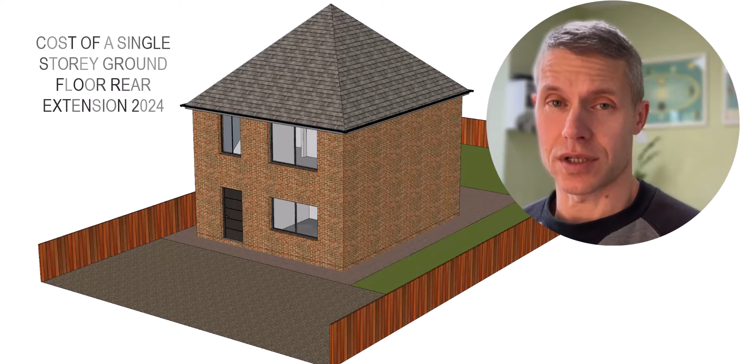Hello, my name's Scott. In this video I'm going to discuss the cost of an extension as of January 2024. The house in front here is a standard house, and I'm going to be putting a standard size extension on it. This is something I commonly prepare plans for in my normal day job.

When I started this exercise I wanted to set myself some rules to work to. All prices have been gathered from the web from various well-known suppliers such as Travis Perkins, Jewson's, Screwfix, Wickes. I generally took 2 or 3 prices and took an average. They may be cheaper or more expensive depending on location and your builder's relationship with the supplier. I've based costs on metre square, metre run, or per item depending on the element of the extension. I haven't allowed for waste.

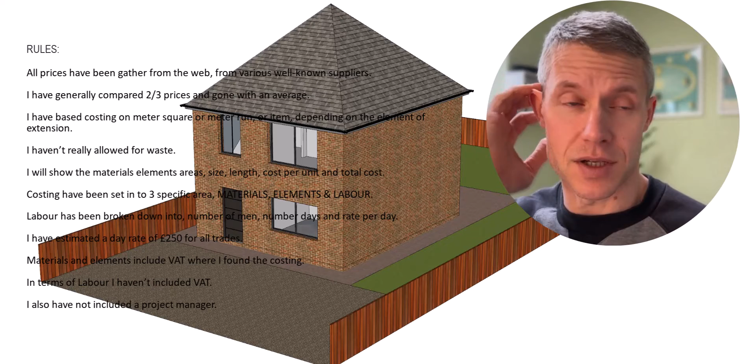However, in terms of roof timbers, if you order them they generally come in like a 3.6 metre span, where you might only need 3.4 metres actually cut for the roof rafter.

I'll show all materials, their areas, their sizes, their lengths, and their cost per unit and total, and how I worked it out if necessary.

The costing has been broken down into 3 elements. If I show you now, we're going to have materials in blue, our element in yellow, and our labour in green, and then the total at the end.

Elements are for things like diggers, skips, and things that aren't included in materials and labour. The materials and elements I've added VAT or done it at cost VAT price where applicable. However, the labour I haven't included VAT.

In terms of labour, I've based it on £250 per day per man. This is just an average I've taken. It might be more or less depending on the builder, labourer, or trade doing it, but it gives us an idea of what it's going to cost.

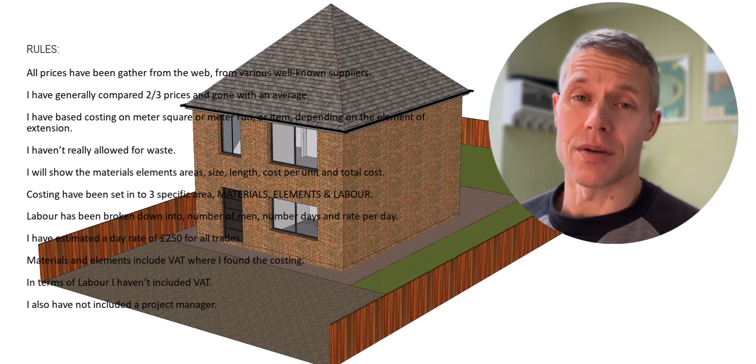I also haven't included for a project manager, i.e. your main contractor dealing with the project, who schedules all the materials, schedules all the labour, organises everything on site, and is the in-between person. A couple of elements I've done comparisons on, so the foundations and the wall construction.

In terms of the project specifics, it's a single storey rear extension to a detached house, approximately 21 square metres of footprint, with an internal floor area of 17 square metres. Technically this wouldn't need planning permission because it would come under Permitted Development.

If you want to watch my other videos you can understand the PD rights and how they work. It would need building regulations, so an inspector would come out and check it at the various stages, which I'll highlight during the video. Everything is standard off the shelf.

There's nothing special or specific about any materials. I've included an underground pipe, so a drainage sewer pipe, and I've also included an internal opening from the existing house into the extension.

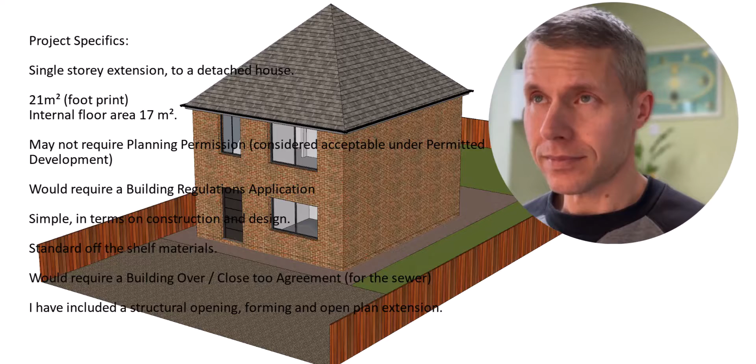Right then, if we look at the house, this is the front elevation. We've got our rear elevation, the alternative side, and let's have a close-up of it.

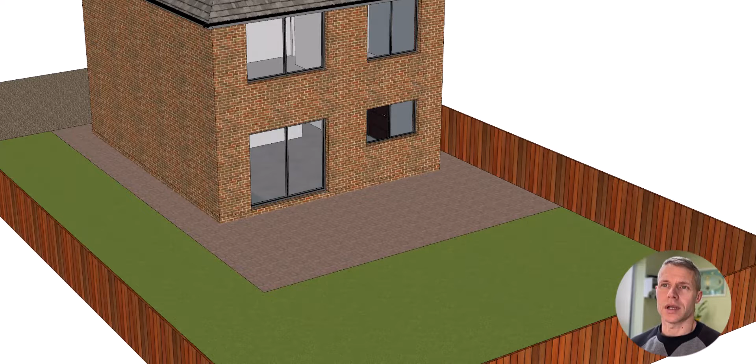Now the extension in question would look something like this. So this is 3 metres by 7 metres wide - 3 metres deep off the existing house and 7 metres wide. It's fairly standard brickwork, roof tiles, roof lights, bifold windows. There's nothing really specialist about it, all off the shelf items.

So have a closer look. We can see that internally it's been opened up into the existing house.

Now the first element of work we would do is to excavate. This shows us our extension here. The outline of it is 3 metres deep by 7.1 metres wide. If we excavated the foundations it would look something like this.

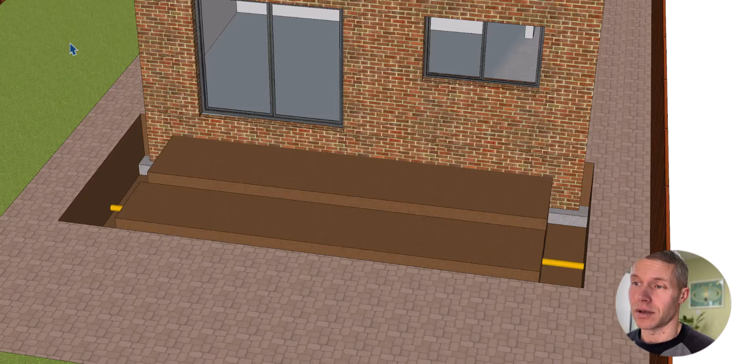This would also be the first stage when the building inspector comes out to inspect. Excavations as a rule of thumb would be around 1 metre deep, subject to the existing foundations, any pipes within the trench, and the ground conditions on which the extension is going to sit.

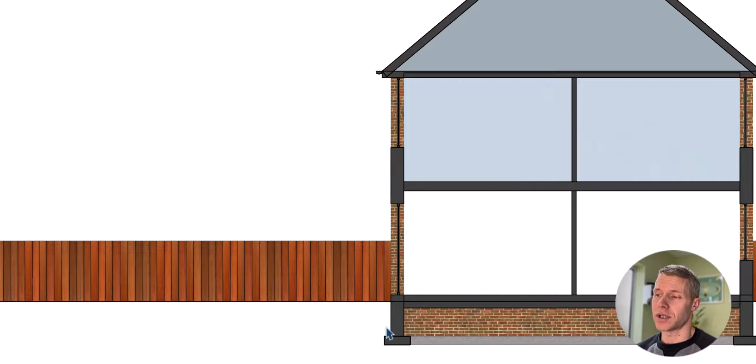So here we've exposed the existing footings, and we can see if we look at a section of our house, that would be the depth of the footings, which is approximately a metre deep. We add our extension on, we'd see that is ultimately what we're building, but our foundations would go out there and our extension would show similar to this.

So we go back to our foundations. Right, then we can see the drainage in the trench.

Now in terms of the excavations, there's no actual materials on this, so we'll start at our element. In terms of excavations, there's about 18 cubic metres of material to move there - that is the foundations and the slab preparation. So there's your formation level, where your slab will be built up off, and these are the foundations, which are thickened up to take the weight of the walls.

So the excavations, you'd need a digger for a day, which I found a costing of around £100 a day, and then you need 3 skips to take away that amount of soil, which would come to around £200 per skip, so we're looking around 600 quid just under. I accounted for 2 men working 2 days at £250 a day, which works out to £1,000. Depending on how hard the ground is, what the dig's like, it depends how long they spend on it. It could take longer - they could hand dig it, in which case it's going to take a lot longer than with a digger. But based on this simple standard, we'll probably look at under £2,000, so around £1,700 to get the foundations excavated.

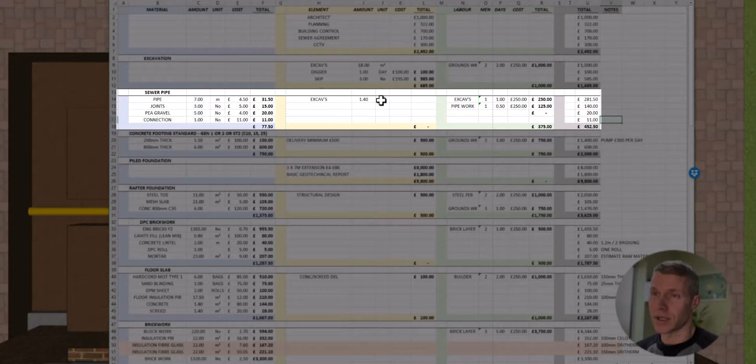Now, if there were more drains going in here, there might be more connections, they might change this element more, there might be more to do, there might be a manhole there which might need to be taken outside of the footing, because ideally you don't want internal manholes, and water authorities generally don't accept internal manholes. So yeah, there are a lot of elements that could increase the cost of this quite easily.

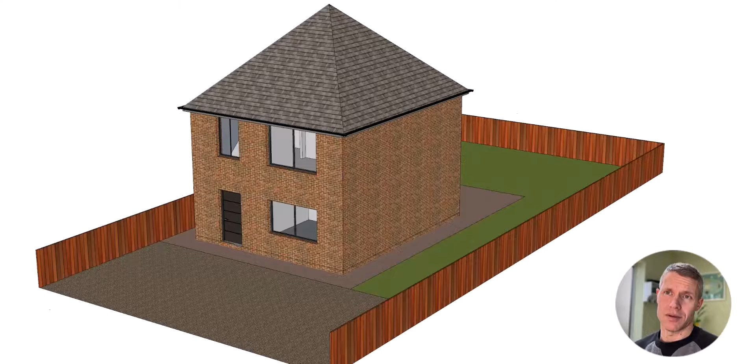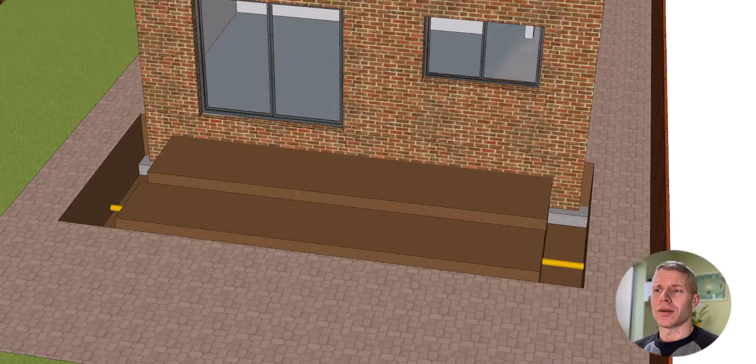So if we go to our foundations, excavations - now the next thing we do is cast the foundations with concrete. So concrete now has been cast, similarly levelled up to the existing concrete. Now the minimum you can cast a foundation is around 8 inches, around 200mm thick, as part of the building regulations. Now that would take you up to about that level, but obviously that's still quite deep in the trench, which might mean the bricklayers are going to be down there building up quite a lot in brickwork. So if we looked at costing at this point, we've got our foundation costs here. So at 200mm thick, you're looking at about 1.5 cubic meters of concrete.

That's about £150. However, delivery, if you're having it brought by ready mix or somewhere like that, there might be a minimum cost of delivery, say £500. So that would be including that - whether it would or wouldn't, that'd be something you discuss with them about how much you need. And I've allowed 3 ground workers 1 day to do this, to find out whether it's being barrowed in or coming in through a pump or anything like that, which again would be additional to it. So yeah, I've roughly estimated it would be around £1,400 to get the concrete pumped into there, or concrete laid into that footing.

Now, as mentioned, if you wanted to mass fill it - i.e. put more concrete in, so there's less brickwork to do to bring it up to your floor levels - which is perfectly okay, for example you could put 800 millimeters thick of concrete in. Obviously this would increase the cost of the concrete - so we've gone from 150 to 600. So now that would make a large increase in the cost in price if you wanted that. However, it would reduce the time a bricklayer spent down in the trench laying bricks in an awkward position.

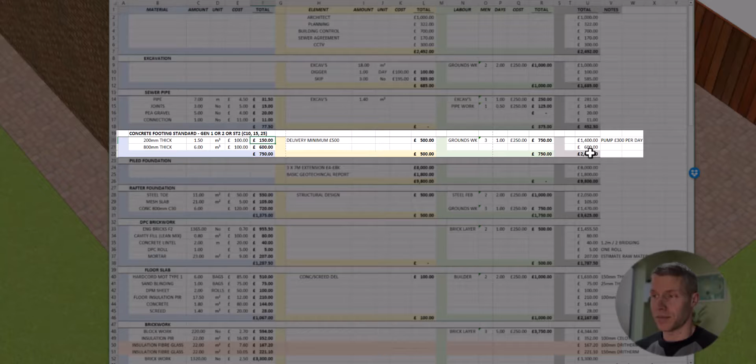Now in respect to the foundations, that's what they'd look like. We've allowed a little section for the drain to be bridged over, which we'll discuss when we get onto the brickwork below DPC. So depending on the ground that you're building on, it might not always be normal concrete foundations.

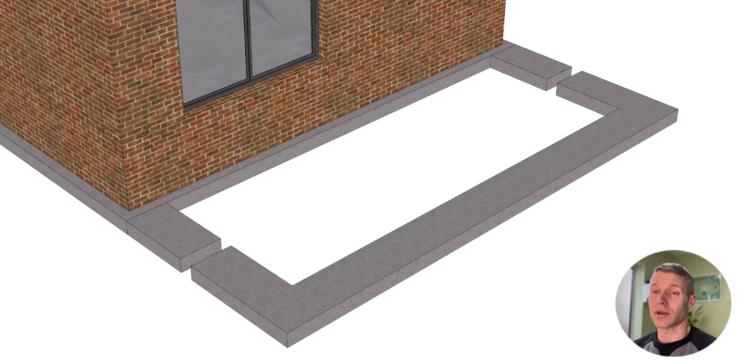It might be a reinforced raft, which is concrete but has steel work in it. This is the same excavation, but this has included a raft. A raft is used where the ground is not stable, maybe it's fill, maybe there are trees close by. There's a number of elements which mean the foundations on their own aren't suitable because the ground bearing capacity of the soil below won't take the weight. So in this case we put something called a raft on, which spreads the load all across the foundation.

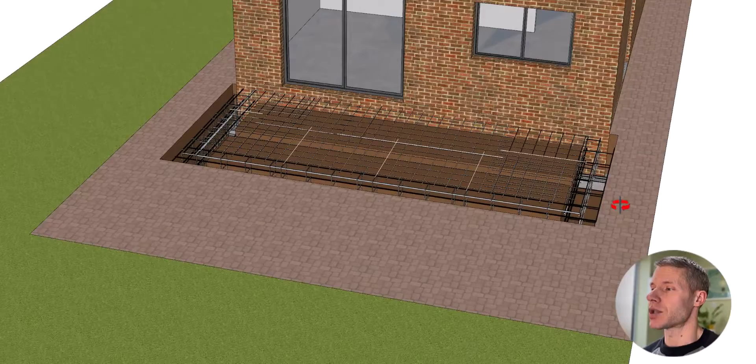This can be fairly standard. They're used quite regularly in different areas. I used to do a lot in an area that was heavily coal mined, so there were a lot of raft foundations installed there because a lot of the ground was very weak, fill and mixed rubbish and things like that.

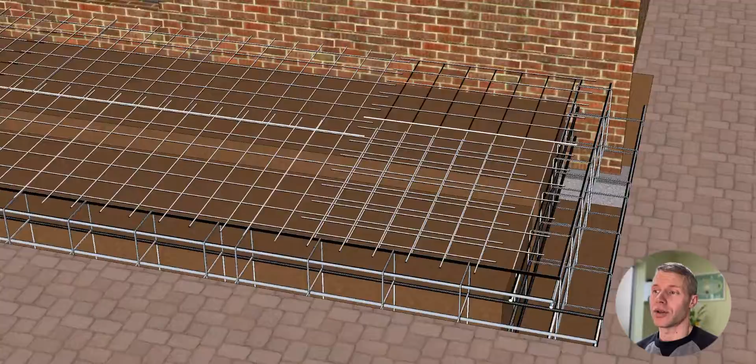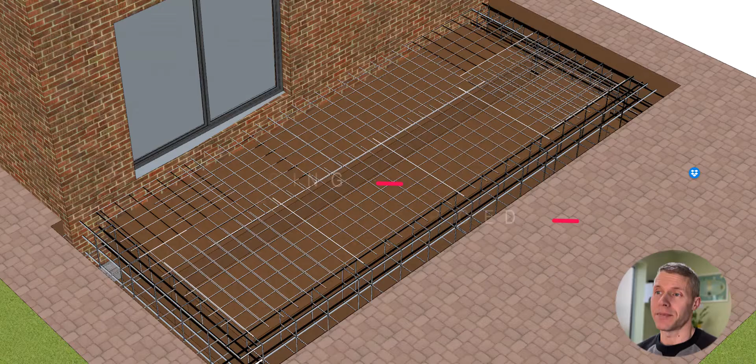A raft foundation is obviously going to add additional cost because you'll still be using the same amount of concrete, but you'll actually have a raft foundation on top. So I've estimated roughly what this raft foundation would cost in this size trench. In addition to your normal concrete, you'd have a steel toe, which is the lower section of the raft - we've got about 11 metre square of that - and then you've got mesh, which is the layer that ties into your floor slab to tie it all together.

With the addition of the raft and the concrete, which is a higher grade concrete specifically for reinforcement, you're probably looking at double the cost of normal concrete. But as well as that, it may have to be designed by a structural engineer. There's also steel fabricators needed to fabricate the raft, or it needs to be fabricated on site, and then obviously the ground workers as well.

So if you look at the comparison, the simplest foundation is around 1400, compared to a raft with reinforcement where you're looking at an extra £2,000 for that, which is quite a lot just in respect to the foundations. So it's probably worth knowing early on if it needs a raft so you can account for that cost.

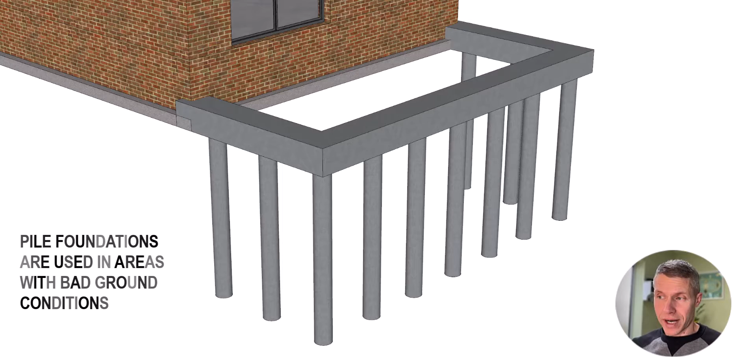Further to that, there is an additional foundation solution for where things are a lot more severe, and that's called piles, where basically concrete or steel rods are sunk into the ground, drilled in, where it's extremely bad ground conditions - this could be trees or big fill sites. You have to find stable ground as deep as it can be, because sometimes you can excavate fairly deep to get decent ground, but if it's over a certain depth it's non-viable to actually dig that deep, and it'd be easier and cheaper to do it this way than digging a 3 metre trench down to natural ground.

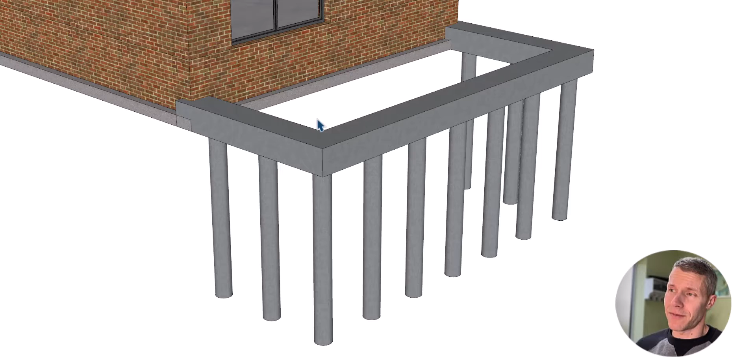It's quite hard to find a specific cost, but I did find an average for the extension size we've looked at - a pile foundation for a 3 metre by 7 metre extension is anywhere between £4,000 to £8,000. Plus you're probably going to have to get a basic geotechnical report as to why you're having the piles, and the design of the raft to account for the ground conditions.

So simply, we could have a very simple foundation - normal concrete, trench filled. We've got a raft foundation where it's reinforced with steelwork in the trench, and then we have a piled foundation, which is a fully engineered solution to a foundation design, costing 4 times the original cost.

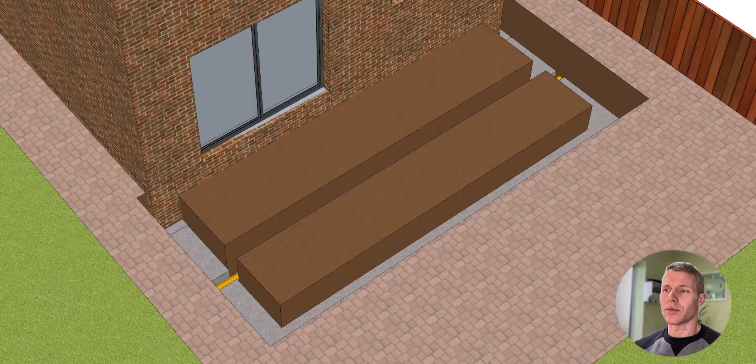Now that our foundations have been cast, the next phase is to start progressing with the build. The first section after the foundations have been cast is building up to your floor level or your DPC level, which is around this area across here. So if I add in some brickwork to DPC level, there we go - that is your DPC level brickwork, which will be the first stage after casting the foundations.

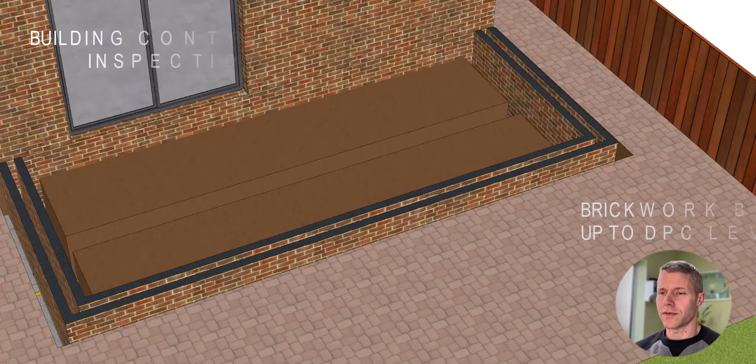Now in respect to this, in terms of costing, we are looking at engineering - so we'd have engineering bricks.

Approximately, I've worked out the number of bricks based on the size and area we've got, around 1,300 at 70 pence each, so you're looking at just under £1,000 for engineering bricks. There'd also be cavity fill, concrete lintels, DPC roll and mortar, plus bricklayers - probably 2 bricklayers for one day to get this up to DPC level.

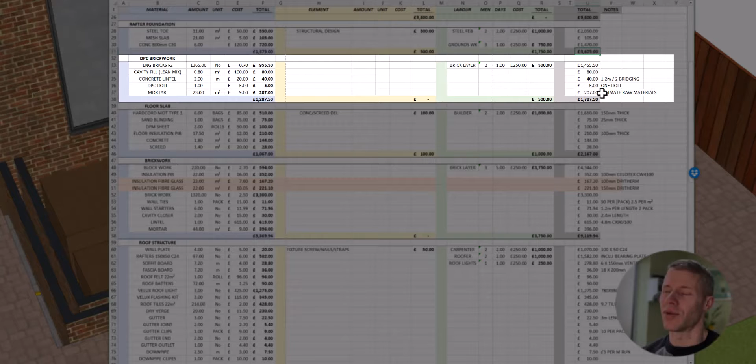So in theory, getting your brickwork up to DPC level is probably going to cost you around just under £2,000. I've got concrete lintels, bought at a certain size needed for bridging, the DPC comes in a roll, and the mortar - I had to work this out off the internet to estimate it with the raw materials, which was quite complicated, but that's a rough idea of how much it's going to cost per square metre.

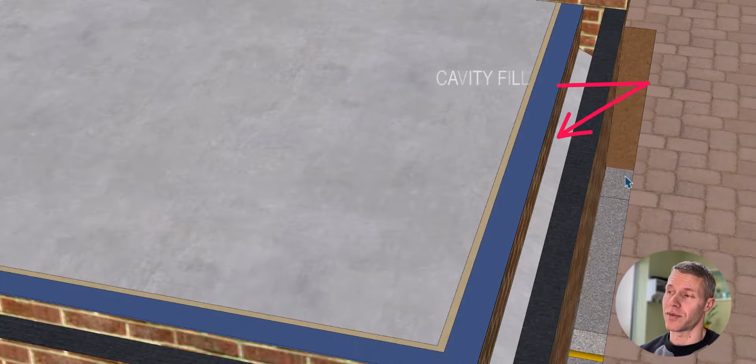So once the DPC level's been done, the floor slab would be cast. The lean mix is cavity fill, which goes into the cavity between the inner and outer layer of brick, to strengthen it up since it's going to have pressure from both sides, and it also forms a tray for any water that gets into the trench to disperse away externally. It's faced like that, normally around 225mm or 3 courses below the DPC.

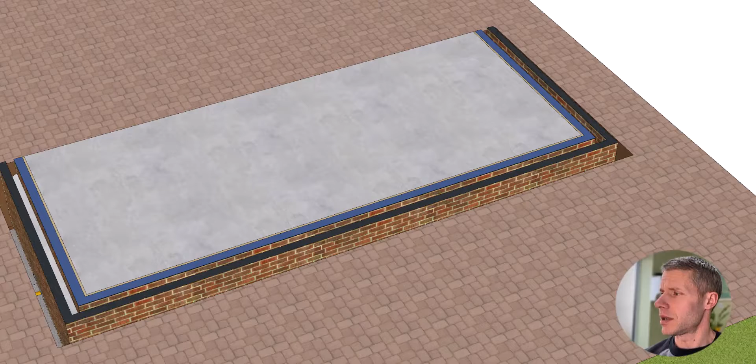Okay, so let's take away the house and landscape and have a look around the back of what it looks like. So that would be your drain going through, your lintels over, your cavity fill up, and we've got our floor slab there. Let's have a look at our floor slab and the makeup and the cost of that.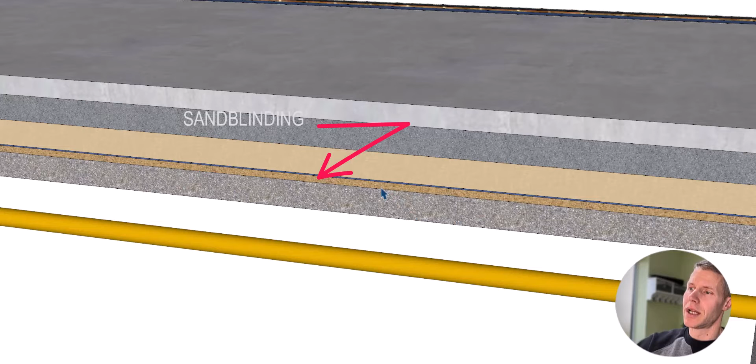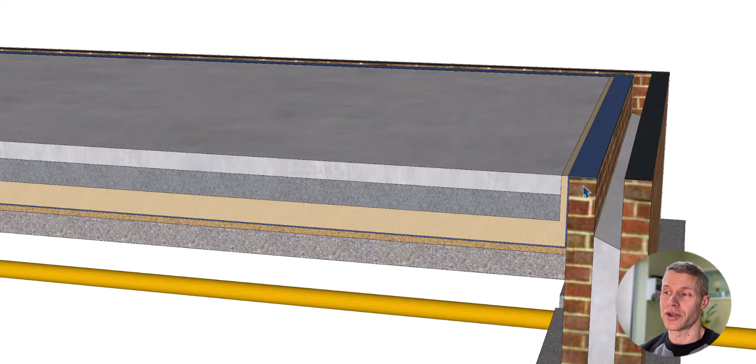So a normal floor slab would have hardcore, sand blinding, a DPM, insulation, concrete and a screed. This can be done in different ways - there's several approaches. You might have concrete as the finish, a bit thicker, with just a latex screed on top, and the insulation might be in between, or you might have underfloor heating over it. In a lot of circumstances there are also 2 layers of DPM needed, depending on the insulation and the manufacturer's recommendations for installation.

So if we look at our costings for the floor slab: hardcore, we're looking at 6 bags at £85 a bag; sand blinding, probably 1 to maybe 2 bags at £75 a bag; our DPM sheet, there might be 2 rolls to cover the area; floor insulation, say 100mm thick. The MOT was to be laid at 150mm thick minimum, your sand blind at 25mm thick, and then we've got our concrete, which would be at least 4 inches, more like 6 to 8, and then a screed - again there might be a screed in different sizes, either latex or thick.

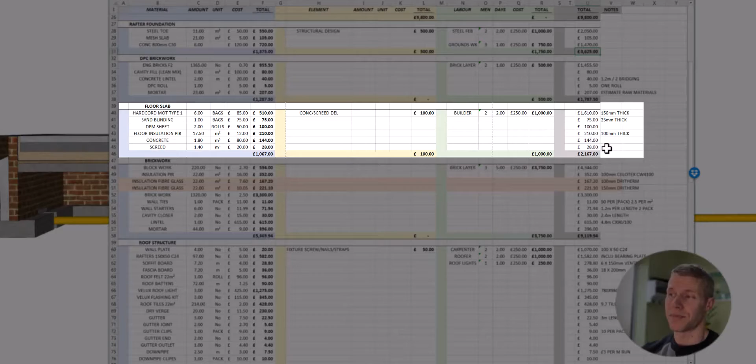You'd have the concrete and delivery element to include, and in terms of builders to cast the slab, you're probably looking at 2 builders, a couple of days to do it all. So I've worked out that to cast the slab, we're probably going to be looking at over £2,000 for this element of work.

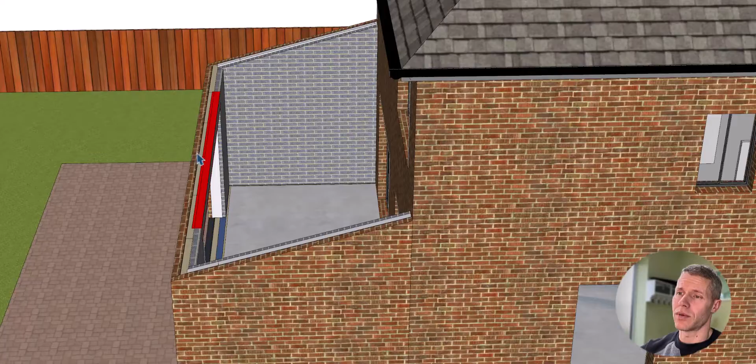Let's go back to our slab. Right then - so once the slab's been cast and your floor slab and DPC are in place, ready to go, we'd then add our wall element. So the brick walls would start going up, with bricklayers on site laying bricks and installing insulation up to your roof level. As you can see, we've got our inner block, our insulation, and our external brickwork, plus a beam lintel forming the opening over the bifold windows.

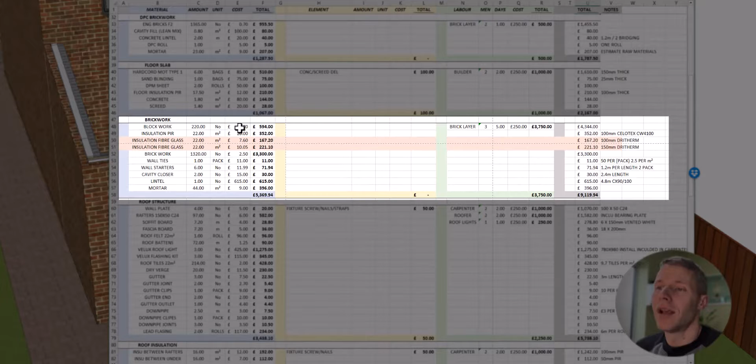Right, so if we have a look at costings for the brickwork - I've based this on the number of blocks we'd use. There would be quality blocks, thermalites, that need to reach a certain R value so the wall reaches a certain overall U value, which I'll go into more detail on in a minute. We'd be looking at around 220 blocks at £2.70 a block, so just under £600. The insulation, again, we'll discuss in a minute, as I've got a couple of highlighted areas discussing the difference in insulations.

For a PIR insulation, which is kind of a Celotex or a Kingspan or an Xtratherm or Quintherm - there's that many different ones now - we've allowed around 22 square metres at £16 a square metre, and that would be for a 100mm cavity.

Bricks, we're looking at around 1,300 bricks at £2.50 each, so about £3,300 in bricks. A pack of wall ties, a pack of wall starters, cavity closers, a lintel, and again mortar. It's estimated, depends on your bricklayers - I could imagine 3 bricklayers would take about 5 days to lay this and get it up to wall plate level, at a cost of around £9,000.

To briefly discuss a comparison, there's wall construction, cavity wall. Traditionally, before June 2022, cavity walls were 100mm with fiberglass and plasterboard on the internal surface, which were fairly straightforward. The U value was a bit higher.

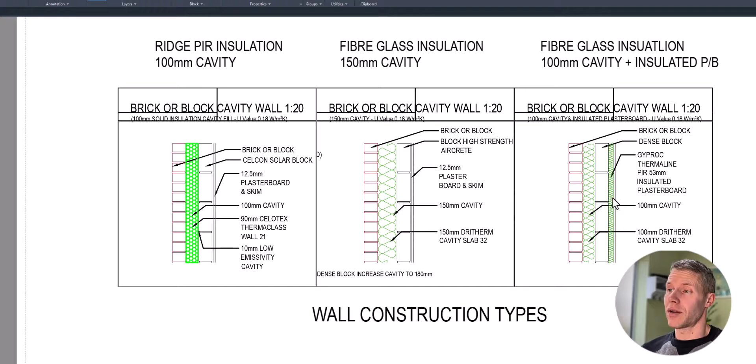I'll go through the actual price difference at the end when I discuss the summary. So if we go back to our extension with brickwork up to wall plate level, the next section is the roof carcass.

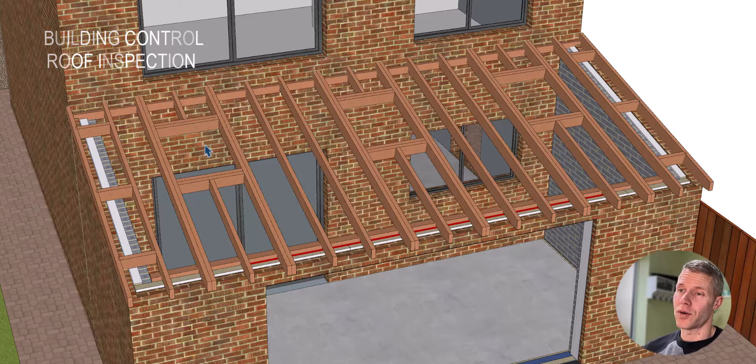Now the carpenter will come along and fit the roof carcass - timbers, he'll allow for roof lights, fixing up gutterings, fascia, soffit, roof tiles, insulation, everything to get the building watertight. So if we add our actual roof tiles on to see what it will look like with the roof on - yeah, that's when it's fully tiled. Soffit fascias on, guttering on, roof tiles on, roof windows in, flashing kits, lead flashing.

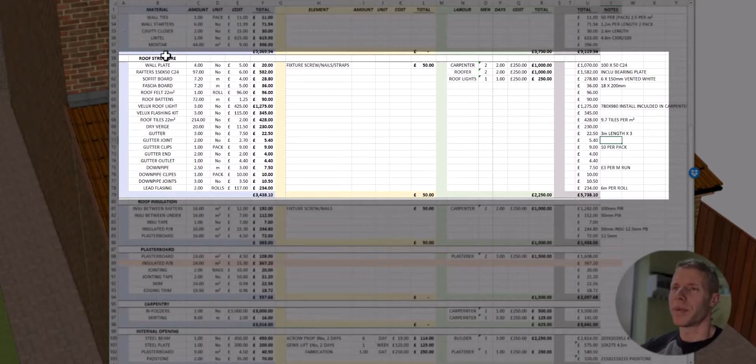So if we look at our costs towards this - our roof construction, obviously there'd be a wall plate. So put this in the background so you can see. So we've got our wall plate.

So we'd have wall plate across there, we'd have our rafters coming down, we'd have our soffit board on the front, we'd have a fascia on the underside, we'd have felt going across, we'd have roof battens then going across, we'd have our Velux lights fitted in, our flashing kits, our tiles, our dry verge which goes down the edge of the roof. Then there'd be the gutters, clips, joints, ends, outlets, downpipes, clips, joints, lead flashing.

In terms of sizes, I've looked at the size of the timbers, the rafters, the size of the fascia, the soffits, the roof lights, per square metre of tiles, length of gutter, packs of clips, metre run. Once you've got all material costs, about £3,500, with some fixings there as well, because you're doing roof straps - we mentioned the wall plate would be strapped down, so it's all fixed. The sides will be strapped down as well, maybe even built in with brickwork as part of the brickwork, and the insulation would come up, so it's all airtight and nice and warm.

Normally allow a couple of carpenters a couple of days, a roofer, maybe 2 roofers a couple of days, fixing the windows, which probably come under the carpenter, but allow for that anyway. So in terms of installing the roof structure and getting it watertight, you're probably looking at just under about £6,000, about £5,700, £5,800.

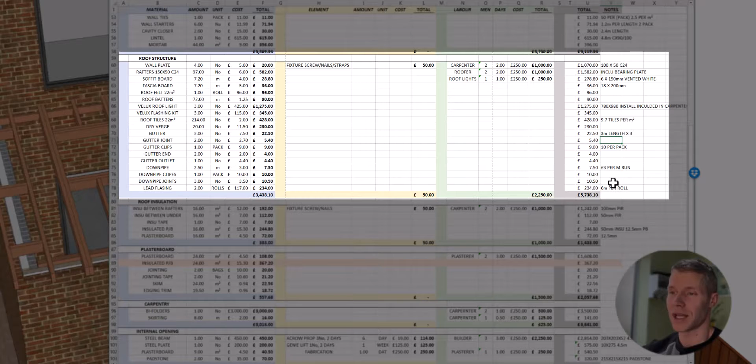Now once it's watertight, you would actually put the insulation in - so we've got it watertight, we would then look at getting the insulation internally into the roof, so it's all insulated and warm. So let's have a look around, let's turn it around and have a look.

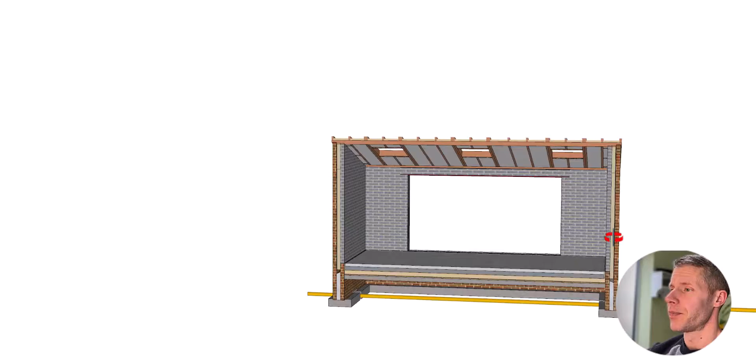Okay, so as a standard we would have insulation in between the rafters, leaving a certain size gap, which is about 50mm, to allow airflow over the rafters. And then there would also be insulation fixed to the underside of the rafters - roof insulation below, there it is.

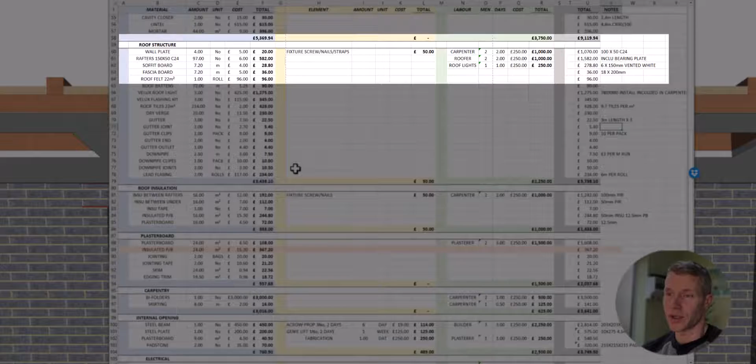Now it can go with a specific roof insulation, or it can go in as insulation with plasterboard attached to it. There are different options of the way of construction. So I've looked at the roof insulation here, we've got insulation between the rafters, looking around 16 square metres, at £12 per metre, so about 200 quid in insulation. The insulation on its own under the rafters might be slightly less than that.

Insulation tape, if you were to have insulated plasterboard, that's a lot more expensive. So you're looking at insulation there at £7 plus £4, so around £11.50 per metre square. But if you're looking at insulated plasterboard, it's around £15 per metre square. This would probably be the carpenters who would install this, and it might be a couple of days, same rate to get it all sorted.

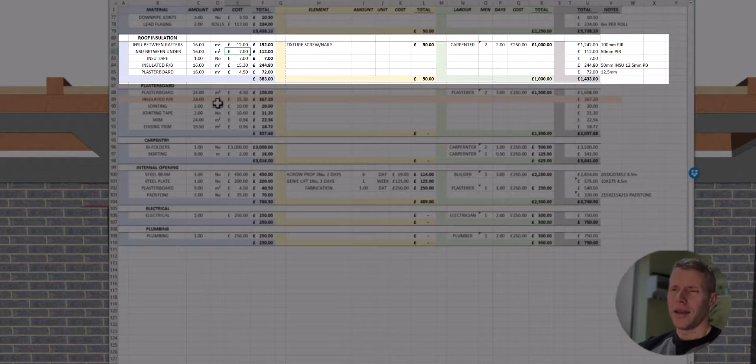Next section would be plasterboarding the insulation. So let's have a look at the internal view. We've got our insulation in, and then they start plasterboarding it. So we can add plaster to the roof and then plasterboard to the walls.

Let's have a look at our costs in terms of plasterboarding. Plasterboarding all of it, we're looking around 24 square metres, so not massively expensive. Obviously if you use insulated plasterboard, it's a lot more expensive. Then we've got jointing, sticking it all to the wall, the adhesive, and jointing up all the corners. We've got jointing tape, skim, and edge trims and everything like that. I worked it out to the size that we need specifically for this.

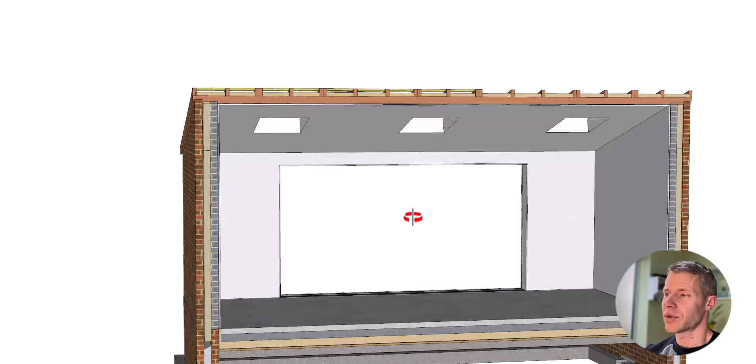So in terms of plastering it out, in terms of material, you're probably looking just under £600. To be fair, it's not a massive job, so if it took 2 plasterers 3 days to do, you might be looking at about a couple of grand to get it all plastered. So yeah, all plastered, nice and finished and ready for fixing windows and things like that.

So let's get our internal view complete. Now we've got the windows fitted, we've got skirting on. Let's have a look at carpentry, which would normally be a carpenter who would fit the bifolders or a bifold specialist. I've taken an off-the-shelf pair of a bifolding section at around 3 grand. You could probably find one at 2, 2.5, or you might find one at 8, maybe 9, depends on the quality you want.

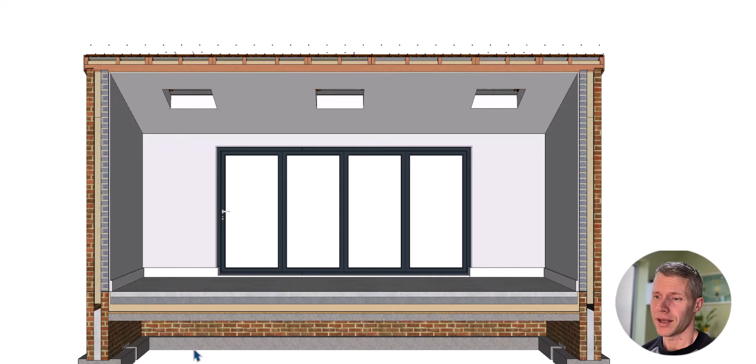Skirting board is very cheap to get all around, you just need a couple of lengths because there's not much really there to tie into. That'd take a carpenter probably a couple of 2-3 days to get sorted. So for that element of work, we're looking just over £3,500.

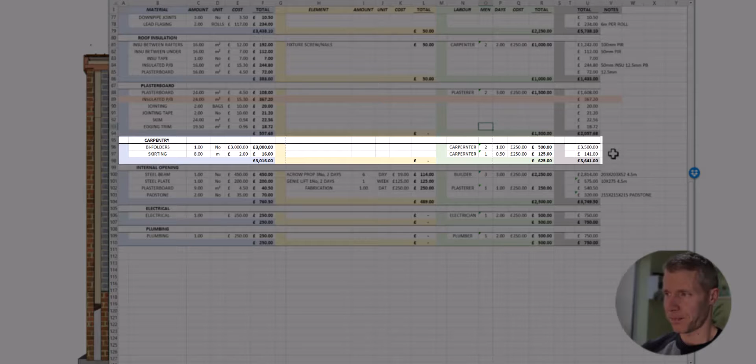So now if we go onto structural opening, once the shell's done and looking at plastering it, if you imagine the extension there's different times when they'd actually put a structural steel into the actual property. Before it's fitted, we've got a section of brickwork they want to come out, and a section lower than this window. So in this one, we've just taken the bearing from the side of the one window to the side of the other door, and then we'd have a padstone and steelwork installed to that. This would obviously be designed by a structural engineer, and this would allow the opening to be opened.

What's going on? Landscaping that keeps getting in the way. How is that? Boundary. There we go. Okay.

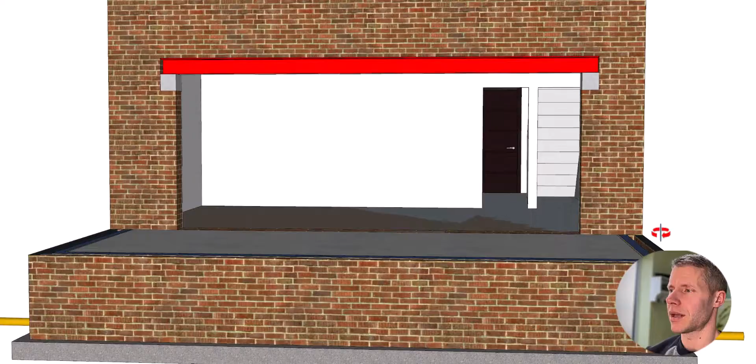So yeah, it would sit on, it'd be supported. Your builder would probably do this work, or your bricklayer, to get the actual steelwork in. So let's have a look at the cost of doing this.

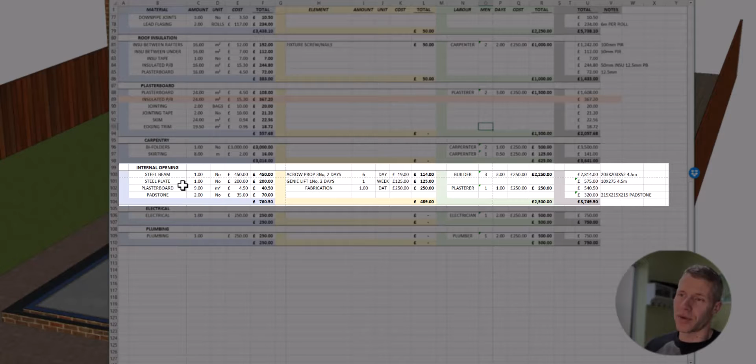So structural opening - the steel beam, I found one for that size would be approximately 450 quid. Might need a steel plate on it depending on the size of the cavity above. Plastering to include that would be around 9 square metres, and then you'd have a couple of padstones as well. In terms of elements, you'd have Acrow props, maybe a genie, maybe a fabricator, all this would be included. The size of the steel would generally be calculated at pre-construction with the architect or structural engineer, whoever's doing it. It might take a builder maybe three men 3 days to get installed.

And a plasterer maybe 1 day to get it plastered in. So at that size, I was looking at something like an 8 by 8, which is 203 by 203 by 52 size steel at 4.5 metres.

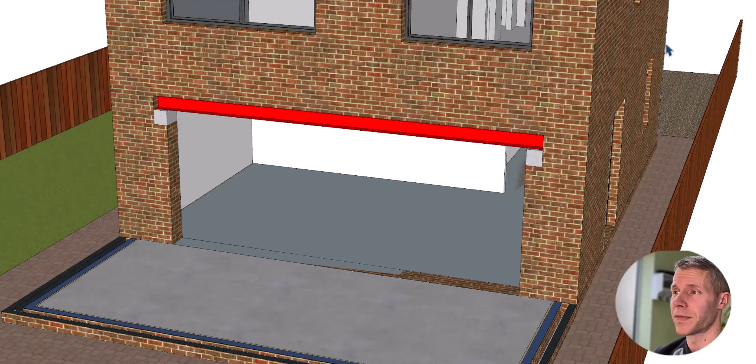A plate to go on top of it, padstones would be fairly standard. As I say, this would be fairly standard stuff. So for forming that opening, we're probably looking over £3,500. Now, there could be additional steels to that.

If you can see at the first floor, we've got an internal wall that might be load bearing, or the one below it might have been load bearing that was carried here if this room was split into two. So there might be an additional steel going back into the house, which would obviously increase the cost because there'd be another steel work to do, more steel pricing and things like that.

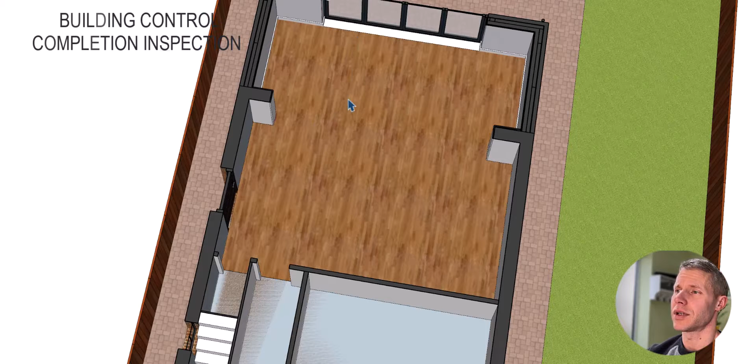So let's have a look at our complete section now. So that's the extension kind of complete. Let's have a look at a section of it to the floor. So yeah, that's what we'll be looking at. So we've got all this new additional floor space, which have kind of doubled the existing space.

Let's have a look at an iso section of it so we can see where it is. But yeah, that might be a nice space. I mean, you can have these piers taken back further. It would be down to the structural engineer to design it to the point of where it can allow it to go back further. You know, we can have steel posts built into walls if you didn't want any at all, but yeah, that is something that needs to be designed specifically for the job in question.

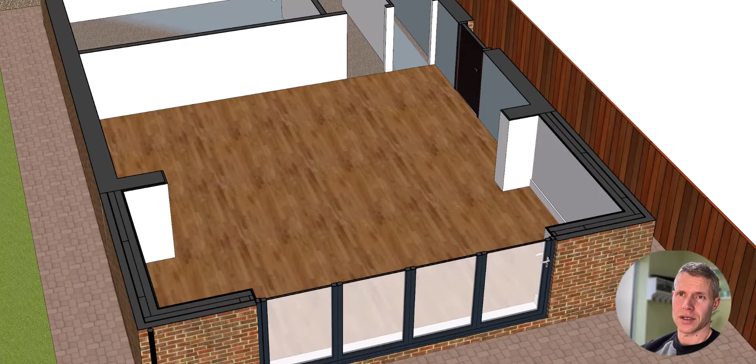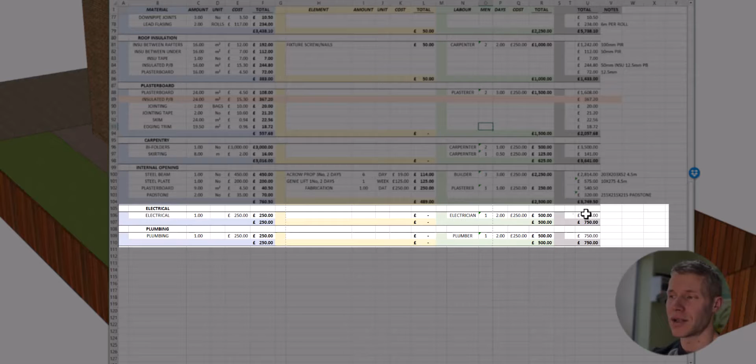So let's have a look at our extension, and then let's have a look at costs. So I didn't include electrics or plumbing and that. So if you wanted to allow, say, plumbing materials, electric materials, say £250, I've done down here. I've allowed electrician 2 days, a plumber 2 days. So I've sort of kind of estimated around £750 per unit, i.e. plumber or electrician, to do this.

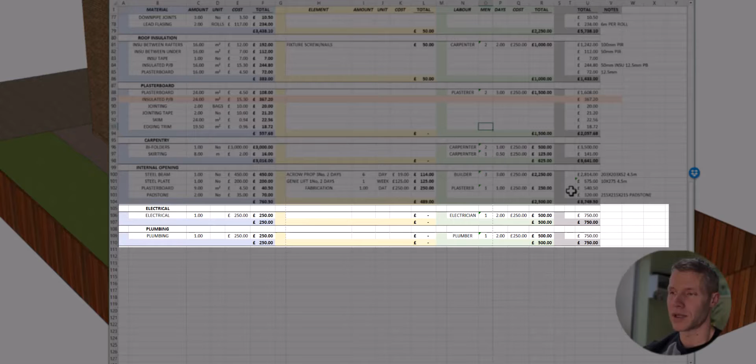It depends on what's going on in there. If it's a kitchen, obviously it'll be a lot more electric, a lot more cost. If you're having fancy radiators or anything like that. So I've just got a provisional figure, so I've got an idea if we included like a minimal amount of plumbing and electrics in there. Right, let's go to our summary sheet.

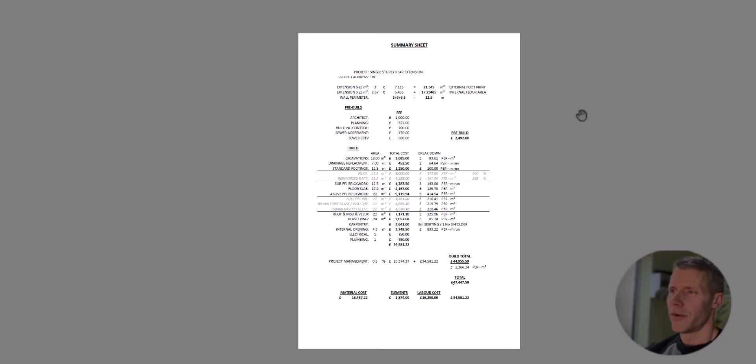So obviously this is where we can discuss a fair amount of the stuff. So pan it down a little bit. Alright then, so obviously we've got a single story. We've got the extension size, which was 3 meters by 7 meters, 21 square meters footprint. We've got the internal size, which is just under 2.7 by 6.4, which is 17 square meters, and the wall perimeter is how we worked it all out.

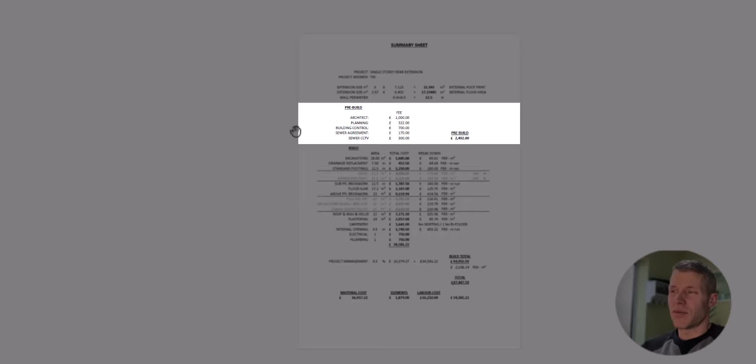Now pre-build, you'll be looking at architect, obviously preparing the drawings for your builder to cost off, dealing with planning permission if needed, or prior notice application and building regulations. If you needed planning, obviously you'd have the planning fee, which is about 322 at the moment. Building control fee - now, building control, you can use either private inspectors or local authority. You need to get costings for the size of the extension of either, but I would probably average around £700 for this.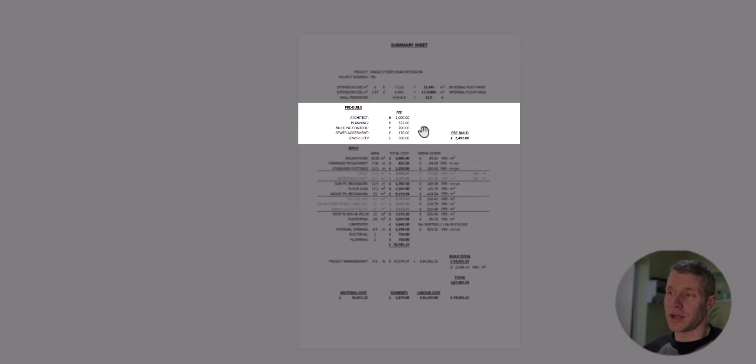Slightly more, I think, for inspectors a lot of the time. I find if the sewer agreement was needed - now I know that my local water authority, up to a 9-inch sewer, we're looking around 170, no more than 250 for a sewer application, but as part of that they would probably ask for a CCTV survey. Now those can cost around £300. It's where a drainage specialist will come on site and they'll CCTV it to check out the condition of the pipe, if it needs changing, and yeah, that's sometimes when it gets changed, and they'll do one after to make sure once everything's constructed the pipe is in full working order. So pre-build, you're probably looking around £2,500.

So in terms of the build, get a bit closer onto that. In terms of the build, so excavations 18 cubic meters, you're looking around £1,700, about 90 odd per cubic meter. Drainage replacement for 7 meters, you're looking about 450 odd, so £64 per meter run. Standard footings, we said we've got 12.5 meter run of footings, so you're looking at about £1,200 in total, about 100 per meter run.

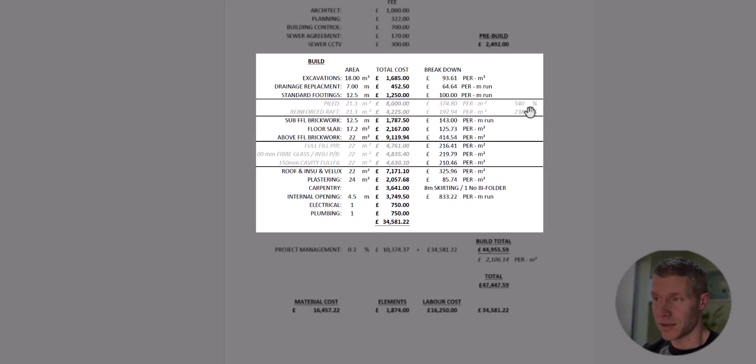Now the piled foundation, if you had to have piled foundation, that increases the foundation costs by 500+%. If you have a RAFT foundation, that increases the foundation cost by 240%. So yeah, so the foundation basically, instead of paying 1,200, if you have to have a piled foundation, you'd be looking at 8,000. If you have to reinforce it, like I say, you're looking at about 2 or 3 grand on top of it.

Subfloor brickwork would cost around £1,700, about £143 a metre run. Floor space for the floor slab at 17 square metres, we're looking at about 2,100, so £125 per metre square. Above finished floor level brickwork, there's 22 metres square of brickwork, we're looking around just over 9,000.

Now in terms of the cavity wall, these highlighted bits are the difference between the cavity construction. If you notice, there's not actually that much difference between them. The lowest one, the 150mm cavity, is 4,600, but the highest one is a full fill cavity PIR. Sorry, let me start that again. It's the fiberglass with the insulated plasterboard that's the highest, but there's only £20 difference per metre square in each one. But that doesn't reflect the cost that might include the bricklayers, the time for doing it, because it's going to take longer to do the rigid insulation, where the fiberglass is easy to install.

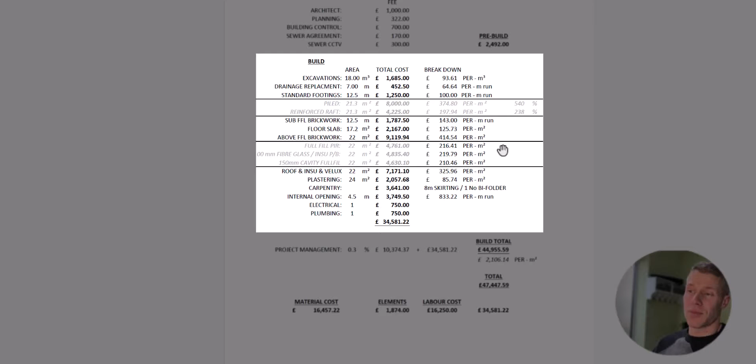It doesn't take into consideration the decrease in size of the room. I know it's only a couple of inches, but inches will make the difference sometimes. With the actual 150mm cavity, there might be a slight increase because it's a wider cavity, so your wall ties are bigger, your lintels are bigger, your concrete footings are going to be wider. All this, in terms of the material, sometimes not readily available. But yes, it's a consideration to make, but in terms of the actual cost, there's not that much difference.

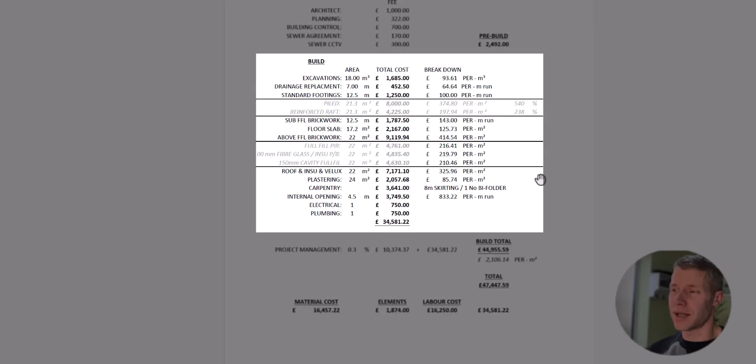In terms of the roof, with the Velux roof lights, we're looking about 22 metres square, around just over 7 grand for that, at around 325 per metre square. Plastering at 24 metres, we're looking around £2,000, so £85 per metre square. The carpentry for the windows and skirting, which isn't major, looking around 3.5 grandish, just over. The internal opening, again for something that size, is around 3,700.

And then, as I mentioned before, we've got plumbing, we've got electrics, just at a guesstimate at this point. Now, if we look there, the materials, all the materials which are worked out cost around £16,500. The elements of work for the hiring diggers, blah blah blah, skips and things like that, around £1,800, and the labour cost for that is around just over £16,000. So in total, we're looking around £34,500.

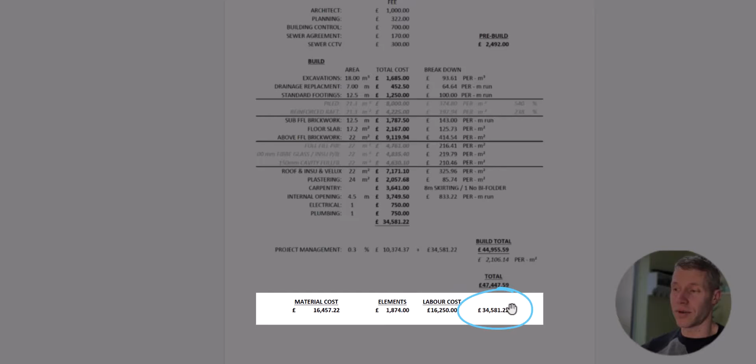Now, as I mentioned before, in terms of project management, that doesn't include, that's just labour. So that is you being the project manager, dealing with all the materials, dealing with all the scheduling of the labour and everything to come in. So if you generally employed a builder, they would project manage it, but you'd be looking at obviously a percentage which they'd include onto or would be part of their costing.

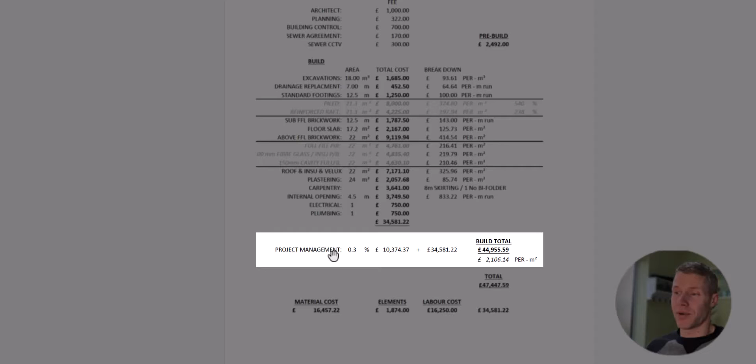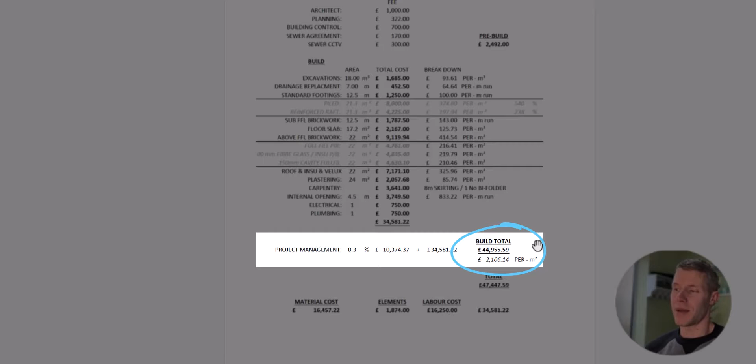Now, say stereotypical profit on things around 30%. So if I put in 30%, that would add on another £10,000 onto your total cost, which would mean the build cost, being project managed by a builder who deals with everything, you'd be looking around £44,900, so just under 45 grand. That would be looking at around £2,100 per square metre for an extension. Adding on your pre-build cost as well, you're looking around £47,447.59 approximately. So it is not cheap to do an extension currently.

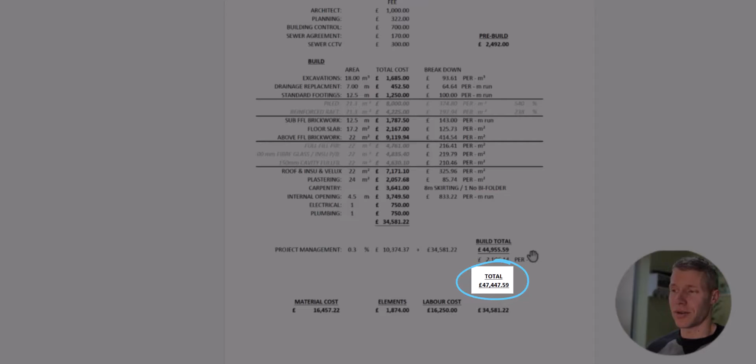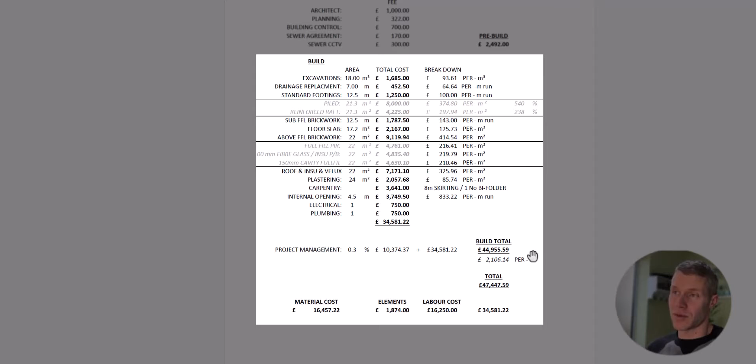If you were to go up above and do another story, obviously there's elements that aren't included in there, so it probably wouldn't be at that specific rate of £2,100 per square metre. You wouldn't have foundations, you wouldn't have drainage, but you would have a more complex roof. You would have a first floor, which might be, well, that's probably slightly less than the roof on the ground floor. There might be more structure and things like that.

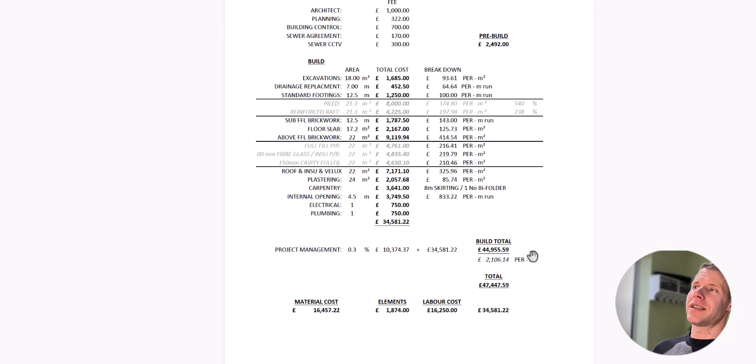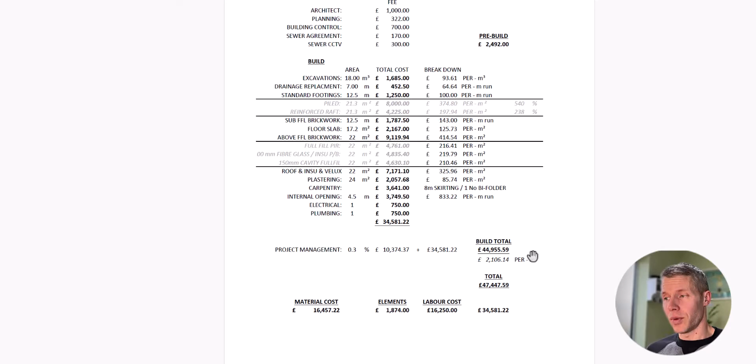In terms of if you were to make this extension double in depth, so if it was 6 metres instead of 3 metres, effectively you're elongating the extension. So although you'd have double the floor area, it might not quite be double the price. However, I can imagine it's not going to be far off, because if you made it 6 metres, that makes a far more complex roof, because you don't generally get rafters or roof joists which span 6 metres without being specialist. So you could end up paying a similar kind of square metreage for that kind of price.

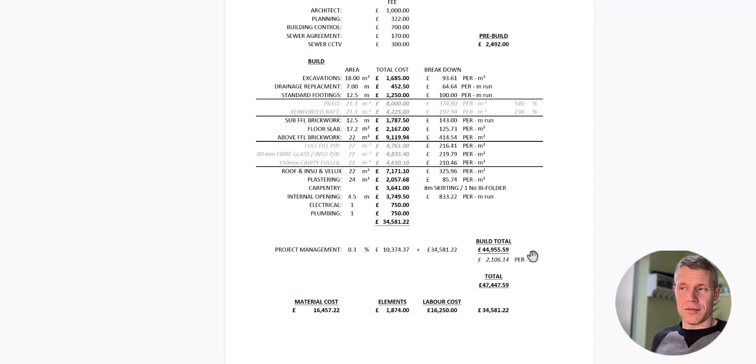So yes, at the moment, building extensions can be quite an expensive job. Now, this is probably about 25% more than pre-COVID, from when I priced up jobs then and was working on it. I wanted a comparison from then to what it is now. But yeah, it is a hell of a lot more expensive.